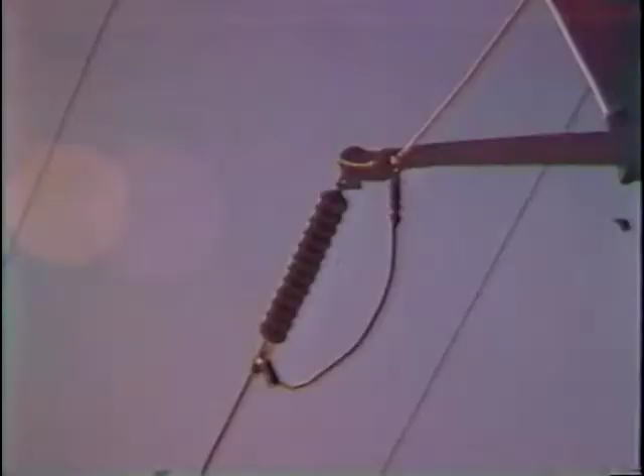Turning on America has been a job the electric utility industry has handled successfully for many years. But over these years, something has been happening. The persistent ticking of history's clock has been measuring one of our century's most alarming dilemmas: while we expect America's electrical needs to continue growing, its energy resources are becoming more vulnerable.

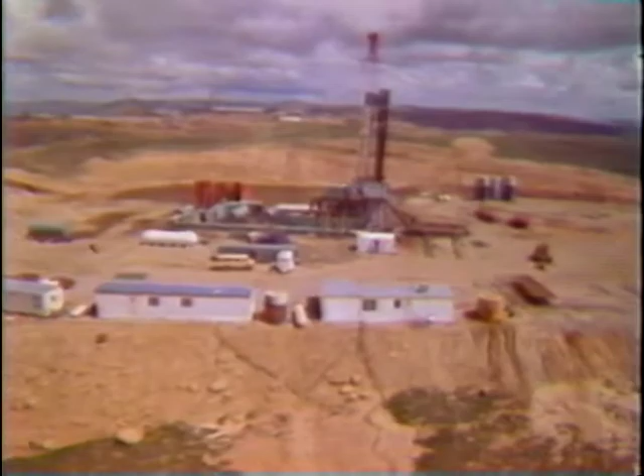Signs of this vulnerability can be seen everywhere. The news media, for example, report on OPEC, the Environmental Protection Agency, the Nuclear Regulatory Commission, and acid rain. Unfortunately, as we seek alternatives, time is not on our side.

But there are answers. What you see behind me is a convincing demonstration that coal, a relatively invulnerable fuel, is one of the answers.

Here in East Alton, Illinois, is a specially designed system. It can take up to 600 tons of economical bituminous coal each day and turn it into 400 million BTUs of clean fuel per hour. That's enough capacity to serve the electric power needs of a community of 10,000 people or more.

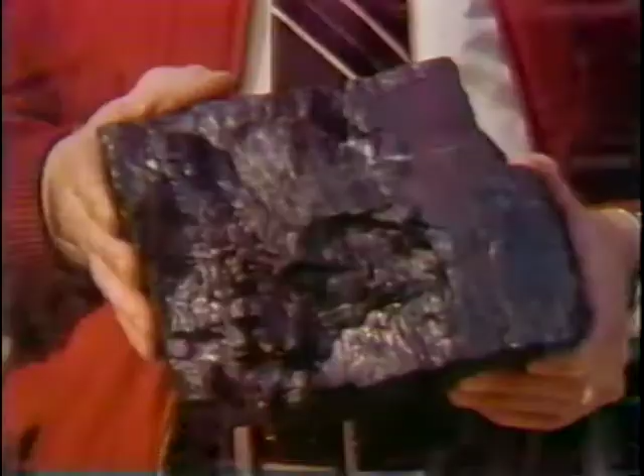No, this is not coal as we remember it being used. Here you see the spectacular result of coal being converted to a clean, efficient fuel gas by a technology that brings the coal industry and America to a new and promising crossroads.

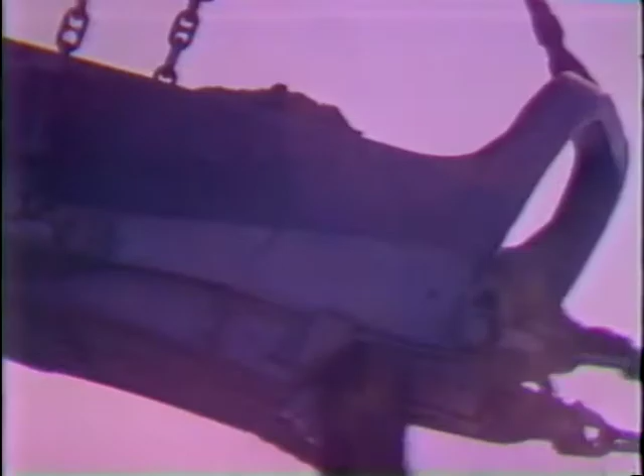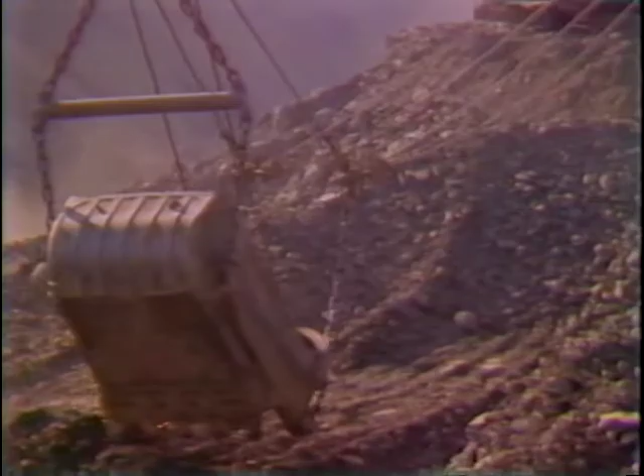But let's go back and start with our basic source: coal. The United States has more than 25% of the world's recoverable coal reserves, enough to feed our nation's power plants for the next 200 years.

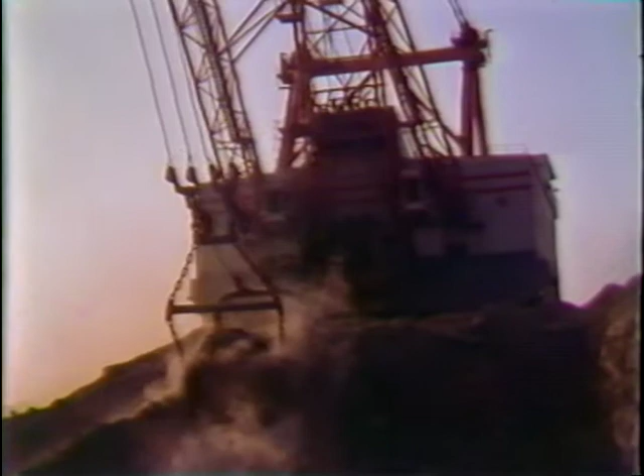The challenge has been how to convert this coal effectively into energy. For much of this coal, past effort has gone into burning it and then cleaning the stack gas. But recent research has shown that a bold new alternative lies in cleaning the coal before it's burned.

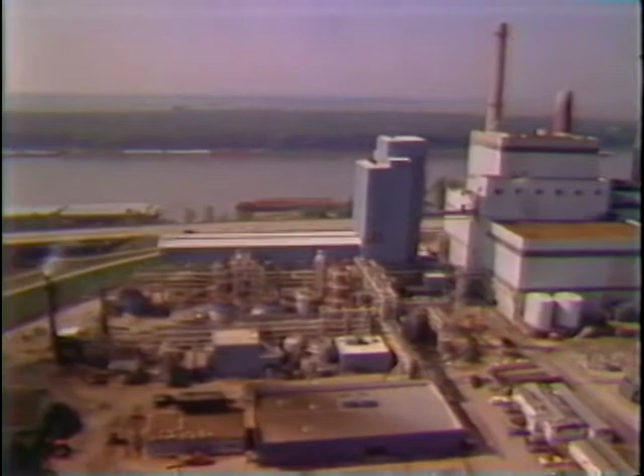For example, by gasification. That's what Allis Chalmers Corporation is doing here at the Illinois Power Company's Wood River Power Plant in East Alton. It has built the nation's first large-scale coal gasification facility to operate in an electric utility environment.

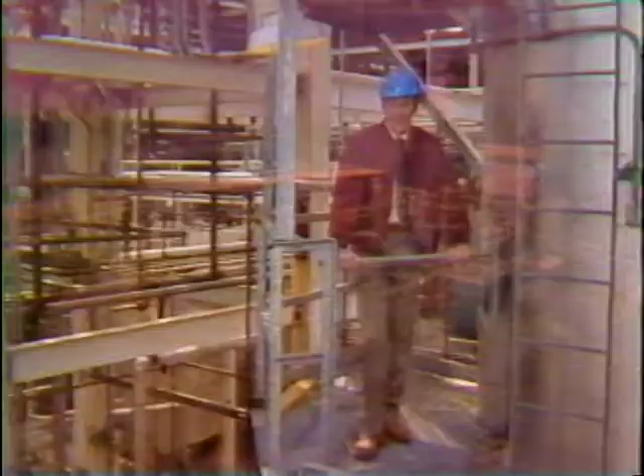In 1970, capitalizing on its extensive rotary kiln experience, Allis Chalmers started research and development work on a new and proprietary coal gasification program, which is now called the Kiln Gas system.

In recent years, it's had technical and financial help from the state of Illinois, 12 investor-owned utilities, and the Electric Power Research Institute, along with appropriate consultants.

The installation at East Alton shows that the Kiln Gas system can provide a viable alternative to pollution-controlled scrubbers with conventional coal-fired boilers, or to natural gas and oil-fired combustion turbines.

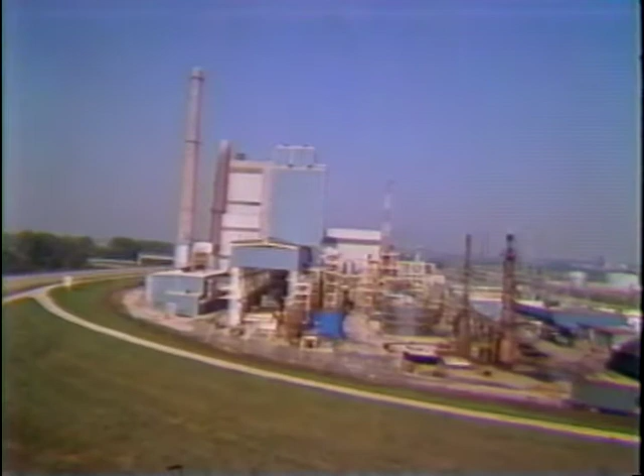And yet, for all of the Kiln Gas advances, the basic concept at work here is relatively simple. To explain, let's use an analogy from the family kitchen.

If you were to attach a couple of taps to a pressure cooker, you could, in principle, make your own coal gas. Hook one tap to a whistling tea kettle so you can inject steam. Then attach a blower to the other tap so you can add just the right amount of air. Now put in the coal and start cooking.

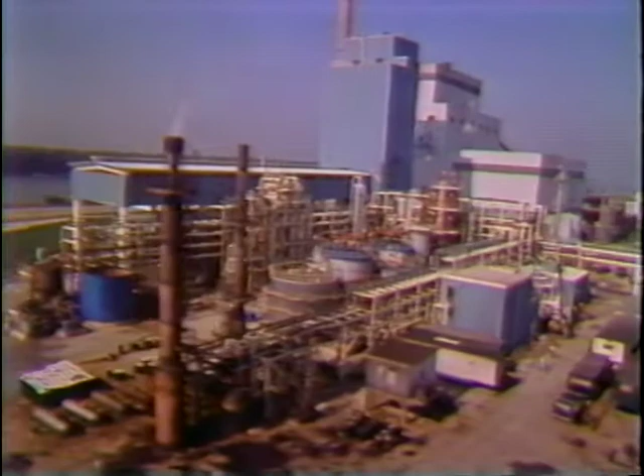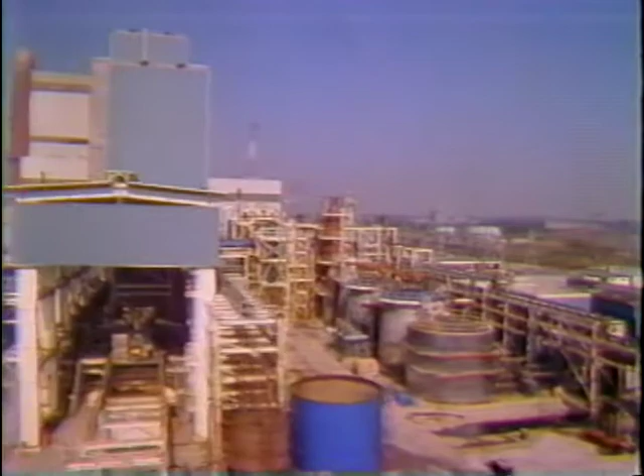Allis Chalmers put principle into practice here at East Alton. This plant is gasifying high-sulfur Illinois No. 6 coal to produce a clean, low BTU fuel, which is fired in one of the Illinois Power Company generating units. The heart of this new system is a ported rotary kiln used as the gasifier.

Coal is fed continuously into one end of the kiln. Air and steam are introduced through the ports near the other end. They provide the oxygen needed for combustion and the oxygen and hydrogen which combine with carbon from the coal to form the product gas. But let's back up a bit.

Remembering the earlier analogy, you might think of this gasifier as a sort of stirred pressure cooker. To understand what really happens inside the kiln, think of coal as an amazingly complex mixture of chemical compounds.

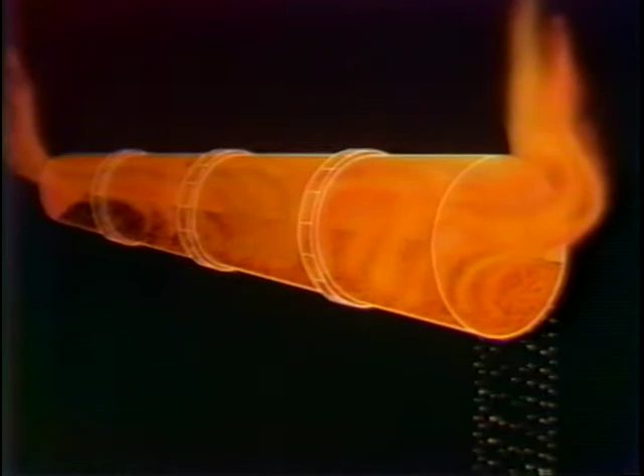As it's heated, several of these compounds are driven off as vapors, leaving char, which is mainly carbon. With the addition of air and steam, combustion and gasification reactions take place on the surface of this hot char. With proper control of these additives, oxygen from the air reacts with just enough of the coal to provide the heat required to keep the process going.

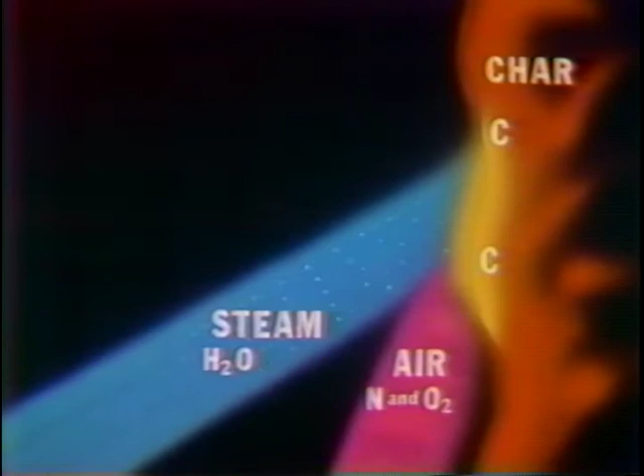The gasification reaction occurs when the carbon and steam molecules combine. The steam, which of course is water vapor, breaks down to hydrogen and oxygen. Then these elements ultimately combine with the carbon to form the principal working components of low BTU gas.

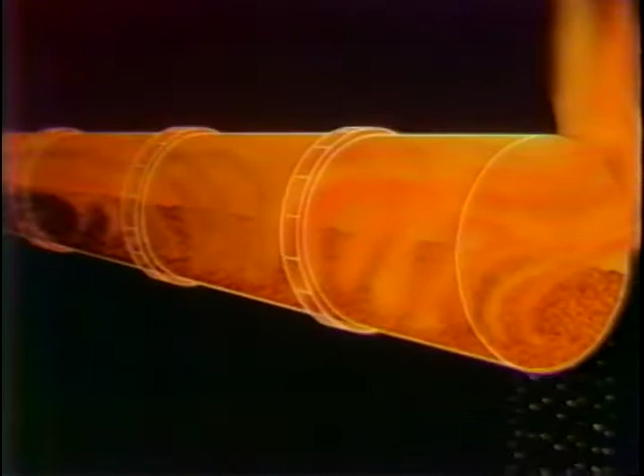The char contains a small amount of material which will not take part in these reactions. This material, mainly silicon and calcium oxides, is the common ash that is discharged from the end of the gasifier. Of course, a chemist would give you a lot more detail, but this is the essence of the story.

After leaving the kiln, the raw gas is put through various dust, heat, and sulfur recovery steps, all of which use commercially available technology. We'll see this in a moment.

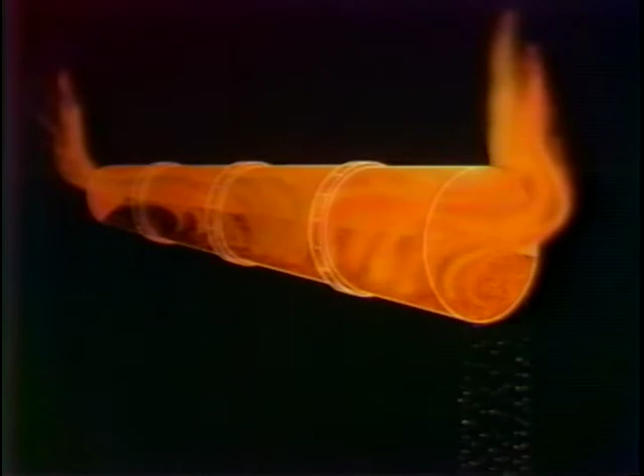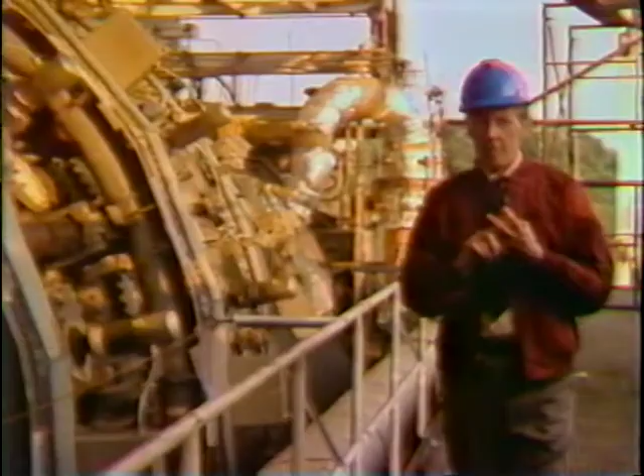At this point, one might ask, what does this mean for producers and consumers of energy? Allis Chalmers envisions its kiln gas system serving two major markets. In the short run, there's the retrofit market to fire existing steam boilers. Now, it means low BTU gas made from U.S. coal that can replace foreign oil and natural gas. We learned in the 1970s that both could become very difficult to get and much more expensive.

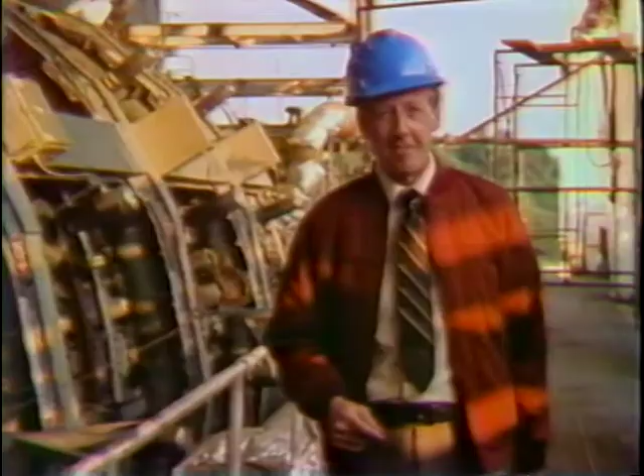In the long run, there is a potentially huge market for new capacity. Now, this includes industrial as well as utility installation. Along with opportunities to fuel traditional new plant equipment, this application includes fueling the power plant combustion turbine, a cousin of the aircraft's jet engine. Combustion turbine technology holds great promise for more economical power plants.

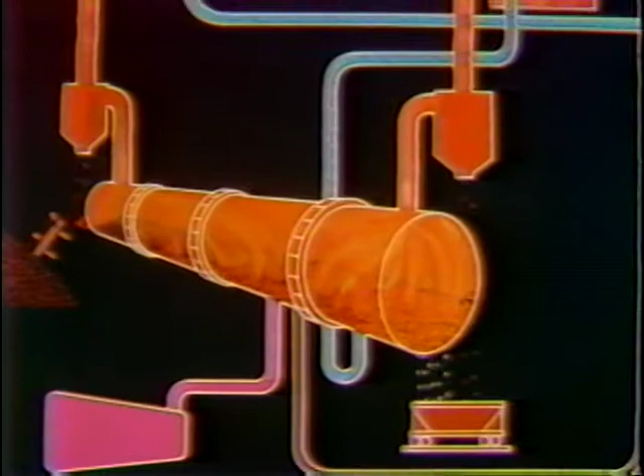Before we go deeper, let's expand our operational diagram to pick up the remaining steps in the kiln gas process. The coal is fed to the gasifier through a pressurized feed system. The reaction of air and steam with the coal produces the low BTU gas. The ash is removed from the discharge end of the gasifier. We got that far last time.

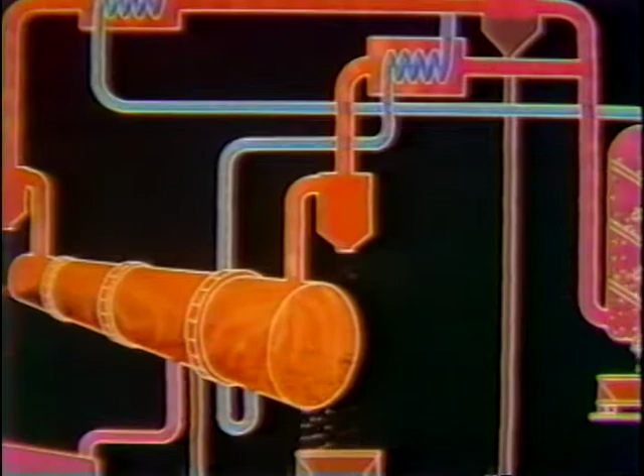The hot raw gas now leaves the gasifier and passes through a cyclone. Here, coal dust is separated from the gas and fed back to the gasifier. The dust-free gas then moves through a heat recovery system where its excess heat is used to make the steam required by the process. From this point, the tar removal system recycles the carbon compounds for further processing.

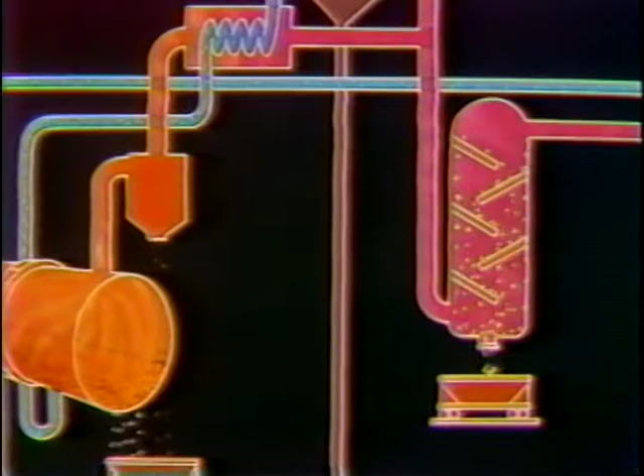The gas stream then enters a commercially proven sulfur removal unit, which extracts elemental sulfur for later sale. Thus, the KILnGAS system effectively recovers its own byproducts. The dust and tars are returned to the gasifier, where they are broken down to make more gas. Heat is recycled to improve the efficiency of the operation, and sulfur is captured in a commercially usable form. Common ash is left for disposal.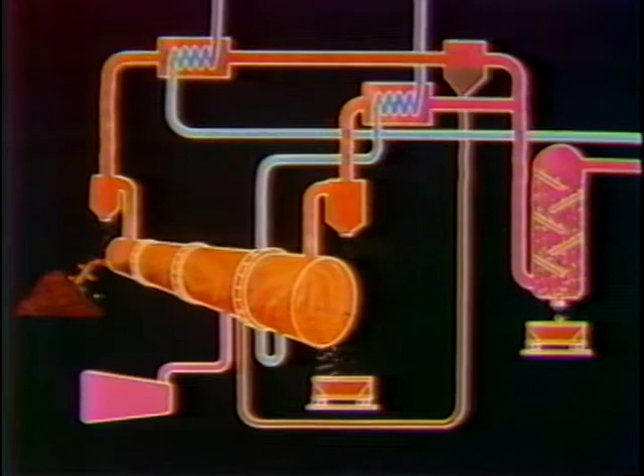What we have then is our final product, a clean, low BTU gas ready to be burned in either a boiler or a combustion turbine to produce usable energy. The energy needed to turn on America in a new way from an old source.

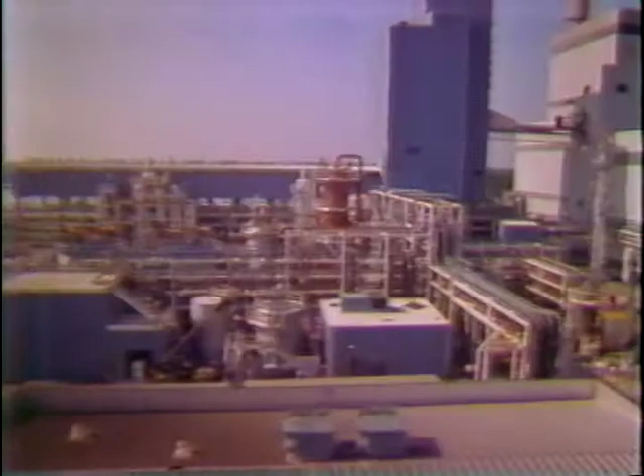The kiln gas system of coal gasification thus offers a bright here and now alternative for the growing needs in today's increasingly vulnerable energy field. With that background, let's return to the subject of kiln gas application possibilities. Here the question becomes exactly what are the chief advantages of this new system?

Well, to begin with, availability. High sulfur coal reserves are not only abundant, they're available to virtually every region of the country. That means no international or geopolitical vulnerability. Instead, plentiful supplies of coal that the kiln gas system can turn into a clean fuel gas efficiently, effectively, and economically.

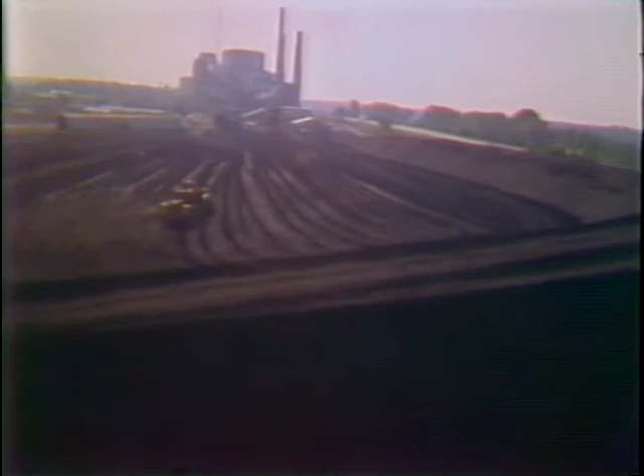The beauty of this system is that it can handle virtually any kind of feedstock, including bituminous and subbituminous coals, lignite, petroleum coke, and even fine coal particles, without special pre-treatment or pre-sizing.

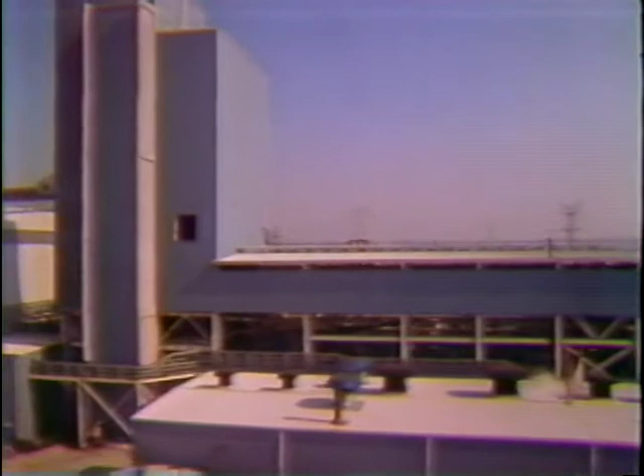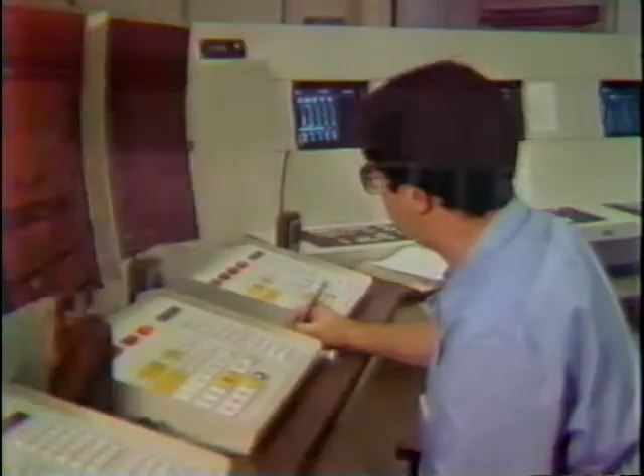In addition, whatever fuel is selected can be tested for any customer in a full-scale system here at East Alton before a new plant is designed. What's more, this East Alton plant can also be used to provide hands-on training for the people who will operate the new plants.

Still, another important kiln gas characteristic is its responsiveness to quick changes in energy demand, both up and down. Simply by adjusting the amount of steam and air blown into the kiln, the operator can match the rate at which gas is produced to short-term changes in the rate at which the fuel is needed. Thus, quick changes are not required in the coal feed rate or in the kiln's rotating speed.

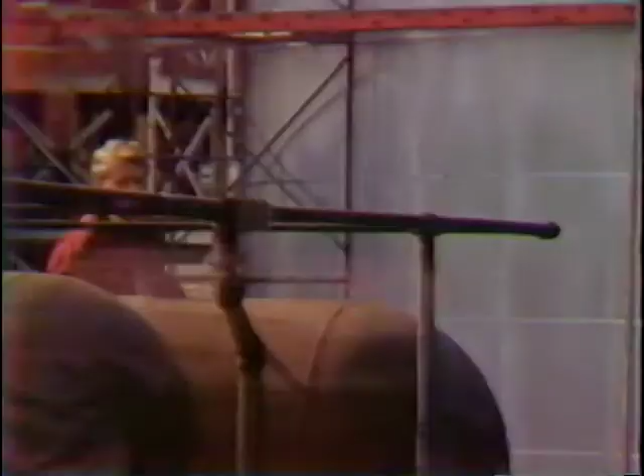Of course, there's always the problem of pollution control. Well, the kiln gas system can meet today's toughest requirements. Commercially available technologies can clean the raw gas to virtually any required level. The principal waste products are well suited either to landfill disposal or resale.

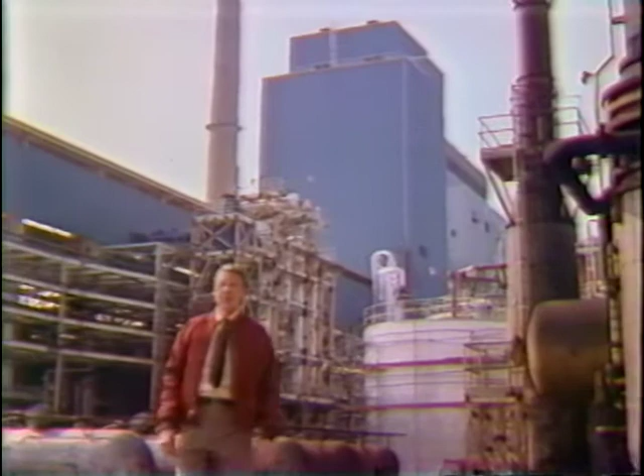With regard to operating costs, those for the kiln gas system are estimated to be lower than for any other synthetic fuel system expected to be commercially available for quite a few years. Why? Well, mainly because the production of low BTU gas requires less processing than any other synthetic, but also because rotary kilns have an excellent record in the large-scale processing of bulk solid materials.

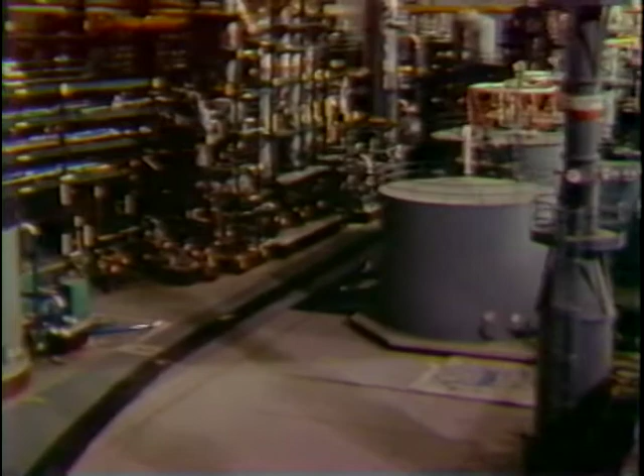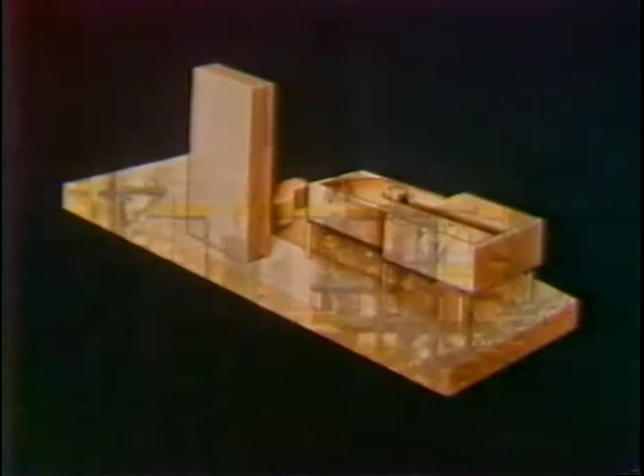One more big plus. The kiln gas system can be used as part of a new modular power plant design that has been given the rather complicated name of Integrated Gasification Combined Cycle Plant. In this application, one or more combustion turbine generator units can be built and brought into what utility people call peaking service, using oil as their fuel.

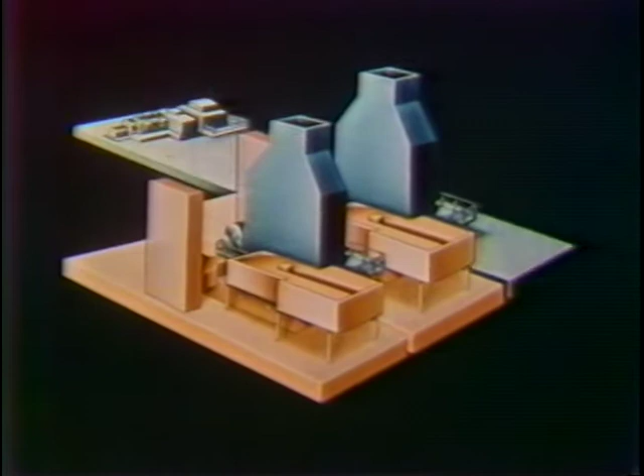Similar units can be added as more capacity is needed, each going into productive service in a relatively short time. When this capacity is needed fairly often, waste heat boilers can be added to drive a steam turbine generator from the heat of the turbine exhaust gases.

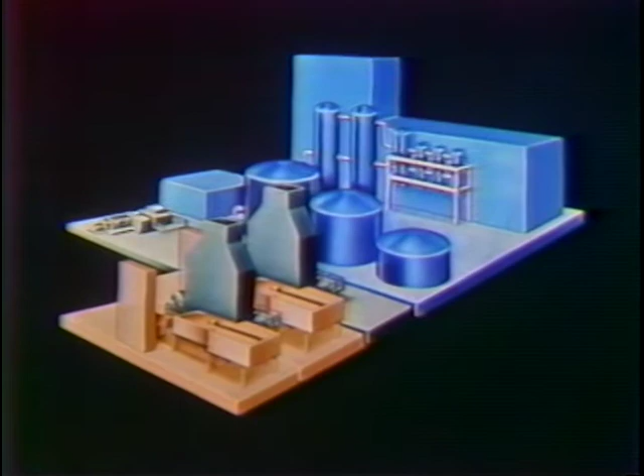Finally, a kiln gas plant would be built on the same site so that the entire generating station could be converted from oil to coal from U.S. mines.

This modular construction has two advantages. First, the owner doesn't have to build a large plant when only a little more capacity is needed. Second, if a large new plant is needed quickly, a modular plant can be built in about half the time it takes to build a conventional coal-fired plant these days. Now, that feature, of course, could save a lot of construction financing costs.

Either way, the modular configuration can help utilities hold the line on rising electric power costs, a real advantage to everyone. The kiln gas operation here at East Alton is only the first of what is expected to be an increasingly important alternative, both for today's retrofits and tomorrow's new capacity needs. In fact, opportunities for such a system in the years ahead appear tremendous, and that would use a lot of coal.

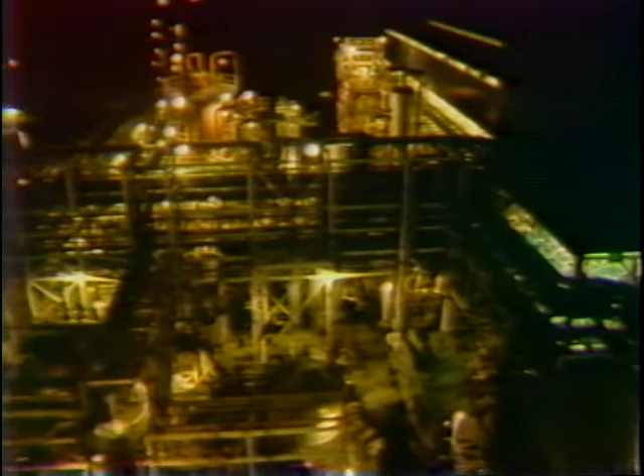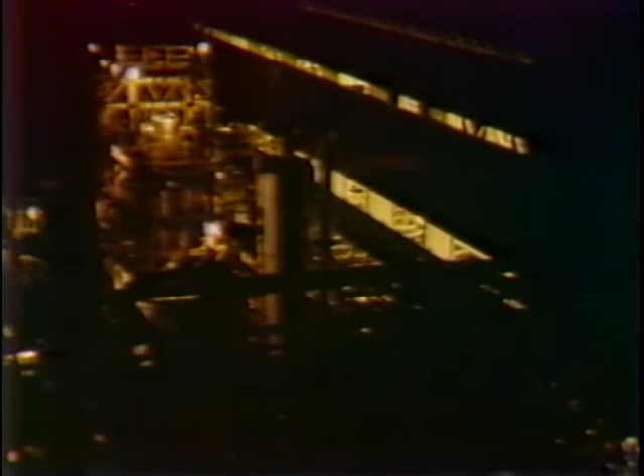America's needs for electricity will continue to grow, as likely will some of the vulnerabilities of its energy industries. So the kiln gas concept being demonstrated here at the Wood River Power Plant comes as a timely here-and-now alternative to help solve that dilemma. It's one alternative that finally takes full advantage of America's enormous, readily available, low-cost coal reserves.

Allis Chalmers heard history's clock ticking. In response, it took a promising principle and put it into productive practice. In a true partnership achievement, the kiln gas system is a successful breakthrough in the search for new energy solutions for our nation's producers and consumers. An innovative twist to turning on America.